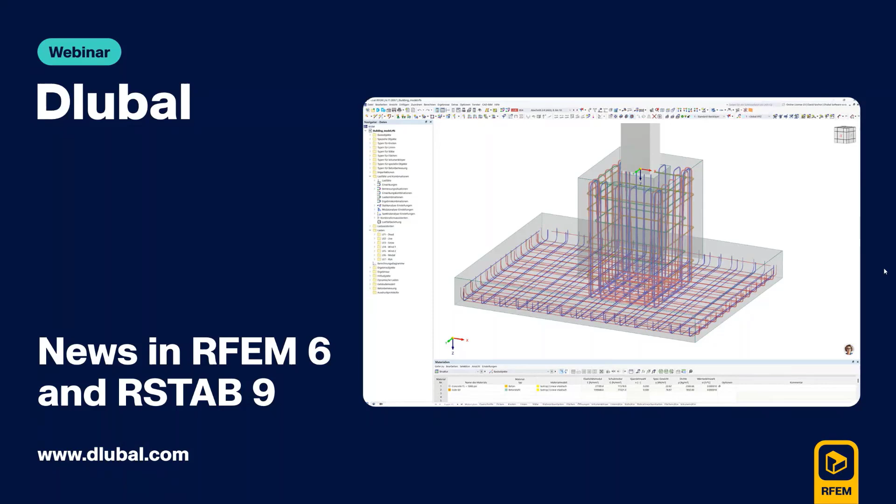Welcome to today's webinar. The topic today is news in RFEM 6 and RSTAB 9. In today's webinar, we will show you features that we have implemented in the last year, in our add-ons, in our programs, our main programs, RFEM 6 and RSTAB 9, and in our standalone programs. And that's the last webinar for the year 2025.

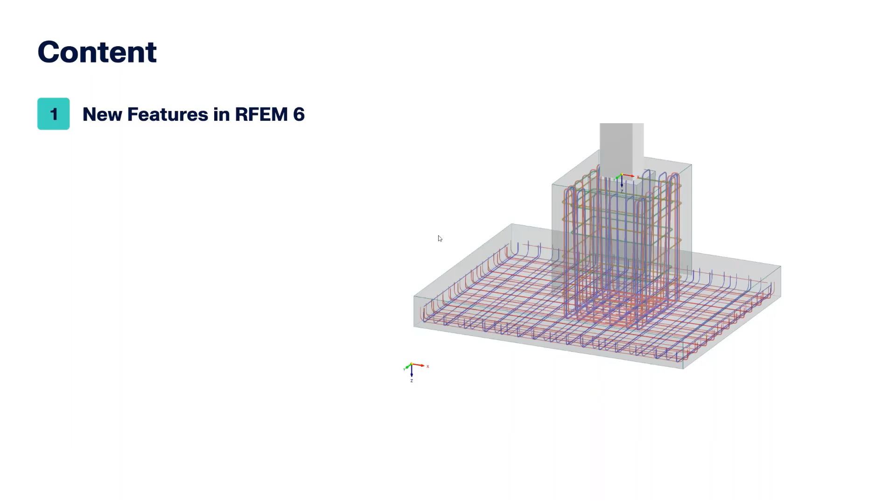To the agenda today: at first, I will show you new features in RFEM 6. Of course, most of them are also valid for RSTAB 9. But as you know, if there are solids or surfaces, then it's only valid for RFEM 6. Then I show you new features in the add-ons and the standalone programs. Then I show you new add-ons, and I look into the future at the end of the webinar.

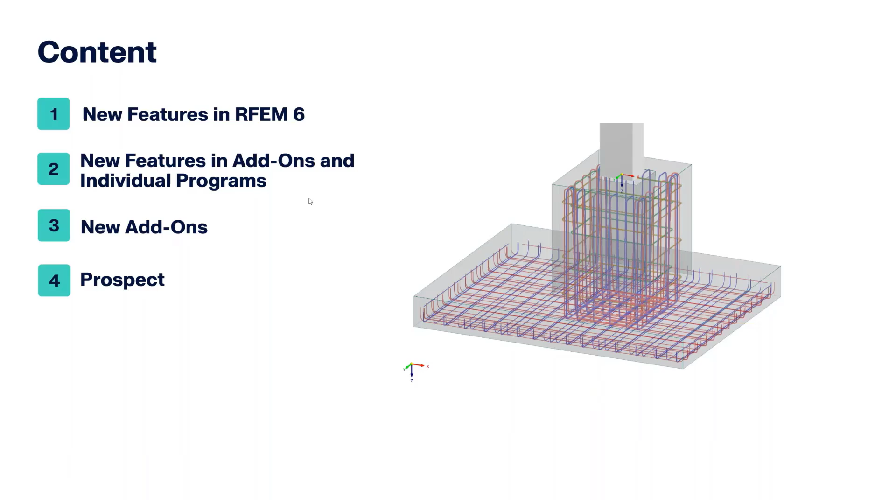Let's start with the features in RFEM 6. First, the result points. You can set such result points very easily on surfaces, solids, and also in the space for wind. I show that in RFEM 6. You can find the result points in the data navigator under result objects. If you right-click on result points, then you can select new result point.

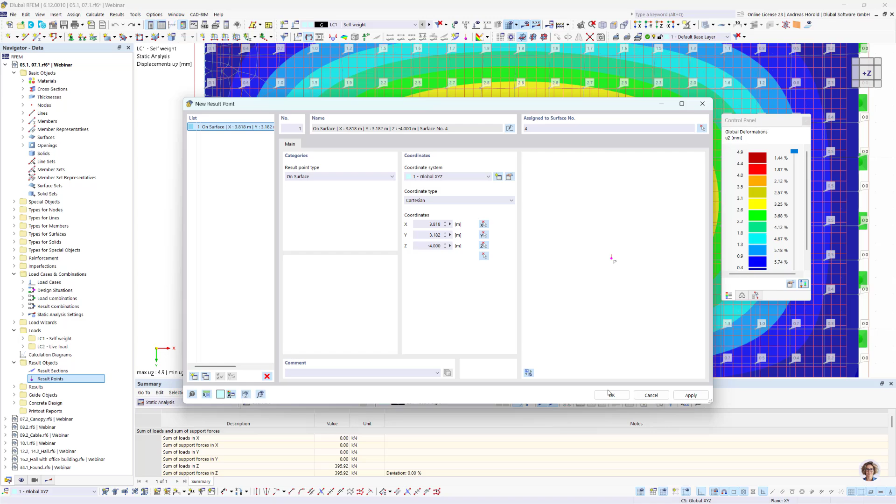Then select any point in the system. The surface is detected automatically, as you can see. And you can see the new result point, also here in the folder under result points. Much easier is to use that button above, new result point, and you can easily set certain result points. And they are also here. And if you want, you can delete any surface result point. Okay, that's all for this feature.

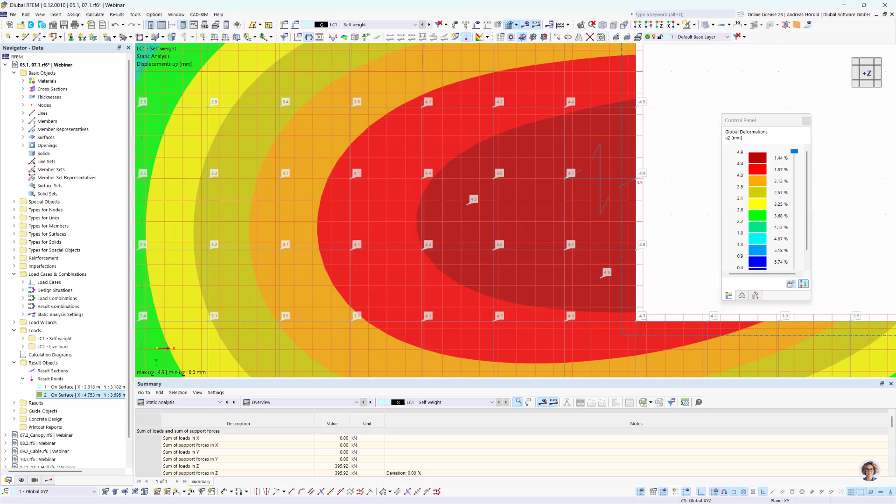We turn to the next feature, back to the PowerPoint. New is the calculation diagram monitor. You can use that, for example, for dynamic analysis. Then the thickness type wall shear free. If you want to use, for example, a masonry wall in a 3D model, and the system shouldn't be stiffened because of the masonry wall, then you can use such a wall shear free.

Then the new member type result line. It's the same function as for the result members, but you don't need to define a cross-section. Only the result line and the area that you select will be integrated. For this area, the results will be integrated in the result line.

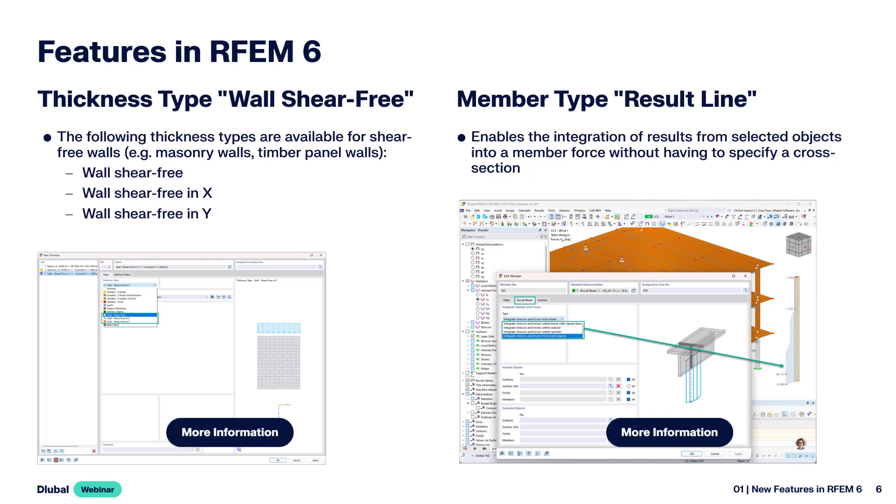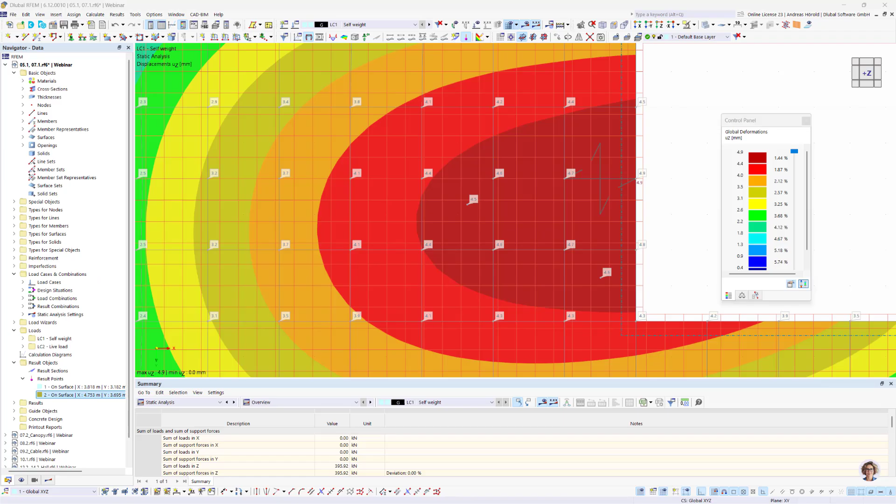Then error messages for invalid and deactivated objects. You can see the error message before the calculation. I will show that in the program. The same model, a reinforced concrete model. If we switch to the concrete design, all members and surfaces are selected, and also the nodes with punching. That makes no sense in this case; we don't have a support in the middle of the surface, for example. So you can see under overview where the error messages are before you calculate the model. And if we deselect all the punching nodes, then there's no error message.

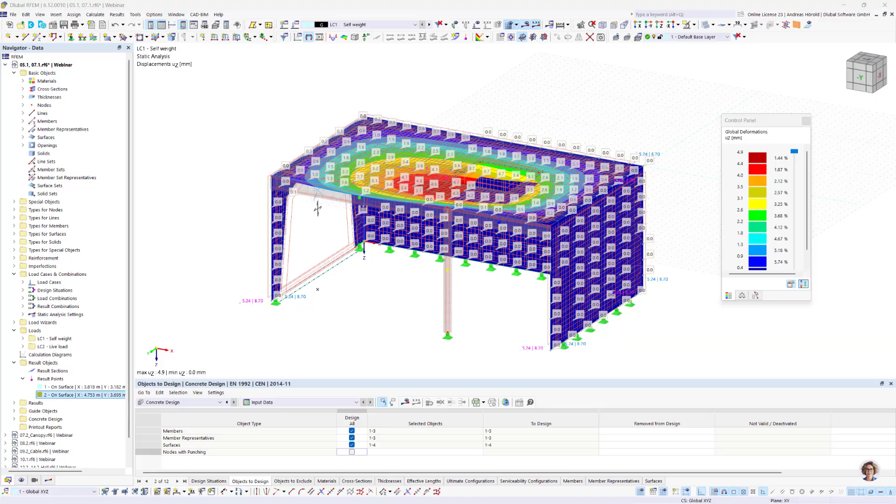Okay, then next feature: life cycle of design results. The results will not be deleted if you want, but they are declared as invalid. And when the calculation is restarted, only the invalid results are updated. I would like to show you that also in the program on another model.

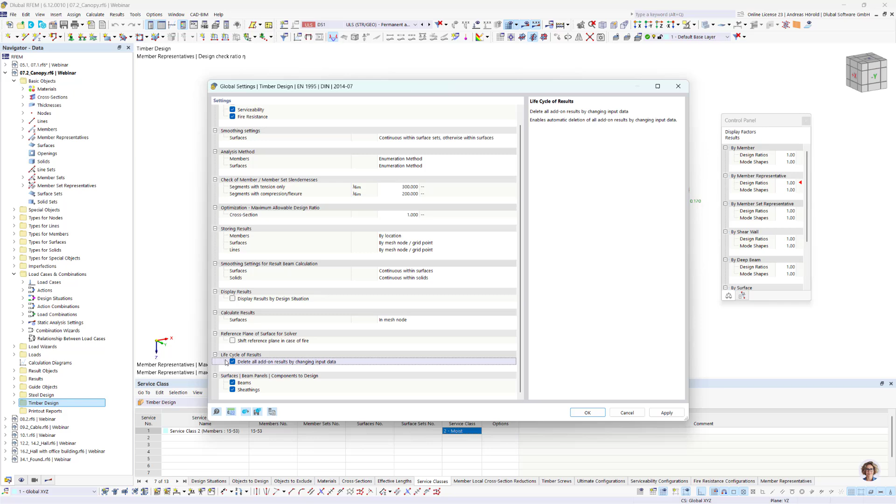For example, for this model, the timber design of the purlins was already done. If you change the settings for one or all of these, for example the service class from moist to wet, then all results would be deleted. We don't do that at the moment. At first, I turn to the timber design here, right-click on it, then settings. If I don't want to delete the results, I have to uncheck this. The default setting was checked, and I uncheck it.

So now when I change to wet, the results won't be deleted, but they are declared as invalid. And if I recalculate all again, then the invalid results will be overwritten.

Often wished features from our customers. So then the next one: you can now log in via your Microsoft account. Then

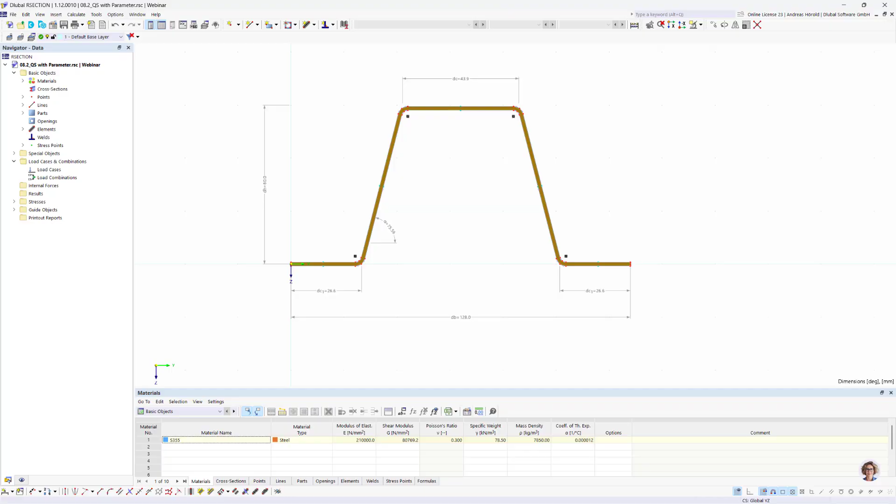parametric cross-sections that you parameterized in RSECTION you can use in RFEM 6 and RSTAB 9, that's clear. But the parameters can be changed directly in the main programs, RFEM and RSTAB. I would like to show that as well. That's a parameterized cross-section in RSECTION. Take a look at the parameters. They are changeable. You can do that here, of course, but also in the main program.

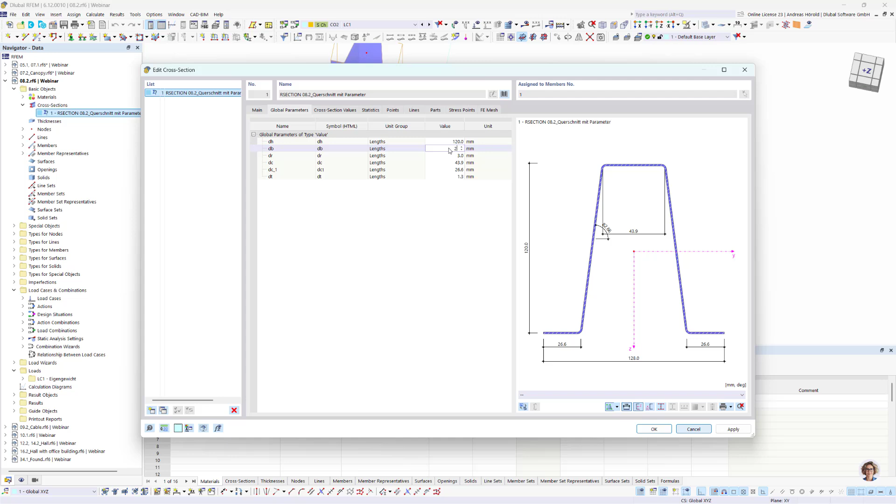So I change to that model. The parameterized cross-section is used. And if I double-click on it, then I can change the parameters here. Yeah, and you can see all will be changed. Okay, then the next feature.

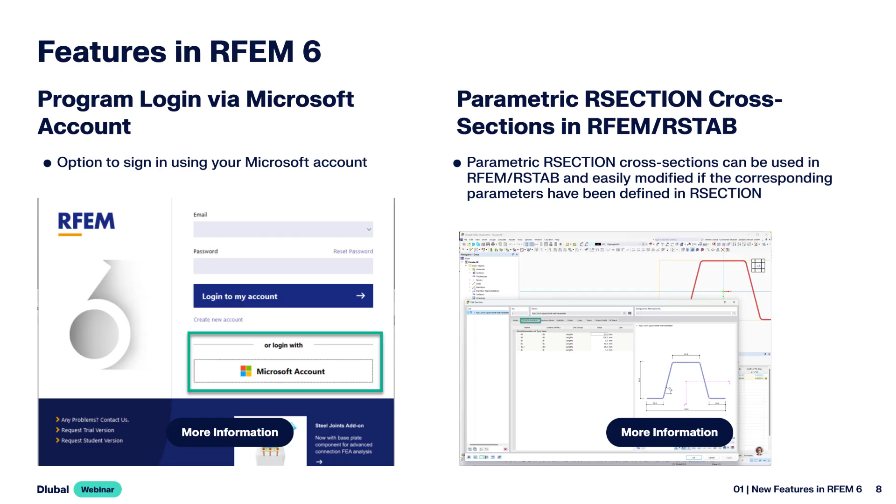The Dlubal API is new, the gRPC. It's up to 15 times faster than traditional technologies such as SOAP or REST. Then use also the member type cable on pulleys. We had this feature already in RFEM 5, but now it's also available in RFEM 6, and you can simulate ropes that are guided over pulleys.

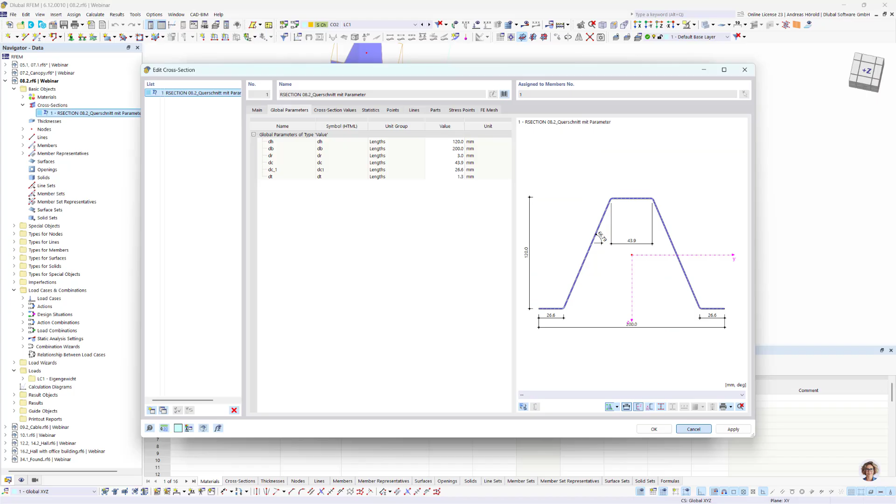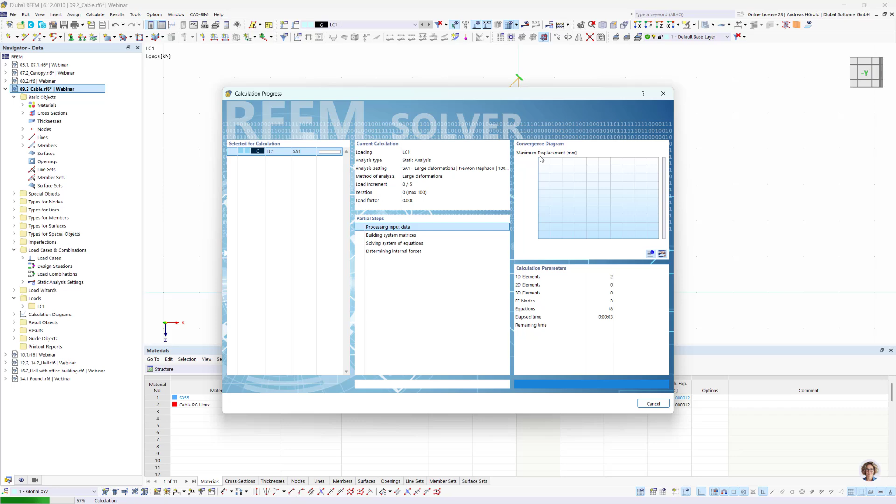And if I change both from cable to cable on pulleys, and then I recalculate all, then the internal force of 20 kilonewton should be in both members. Yeah, also in the diagonal member here. Okay.

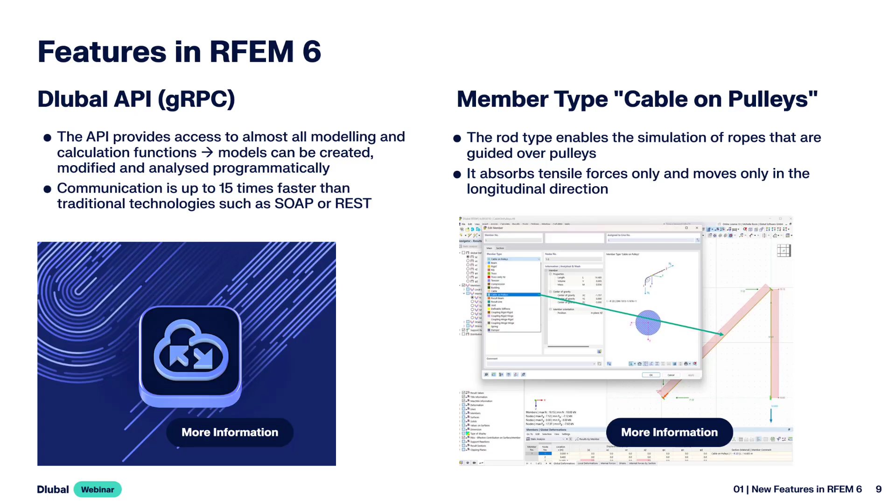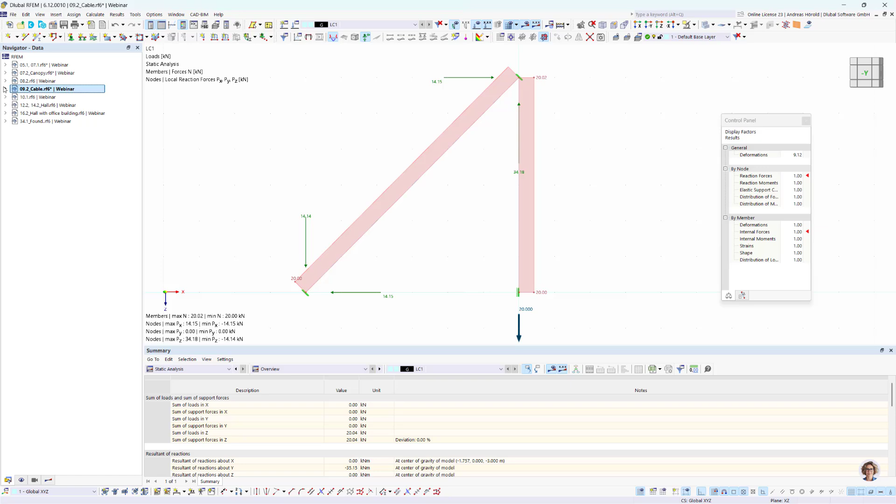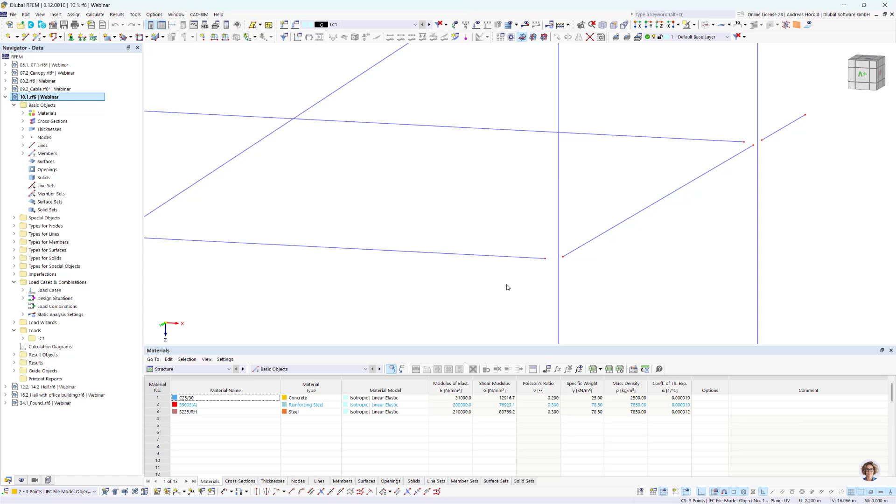So imagine this model was imported from a CAD program, and if you switch to the wireframe model, you can see the members are not connected. And you can do that quite easily when you select, for example, all the nodes, then right-click on one node, edit. And then link, that's the new feature, link to nearby objects.

So I have to create a new nodal link, connect or link to members. Then you can enter a search radius, press OK. And now all is connected by rigid members.

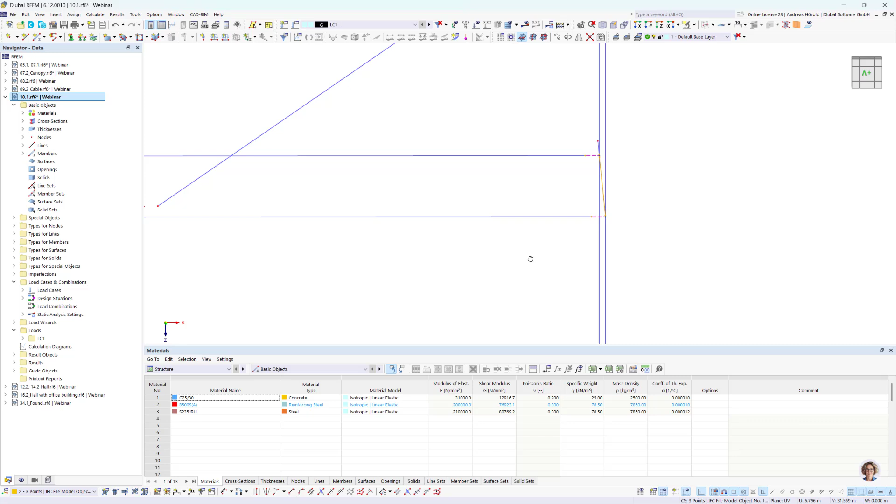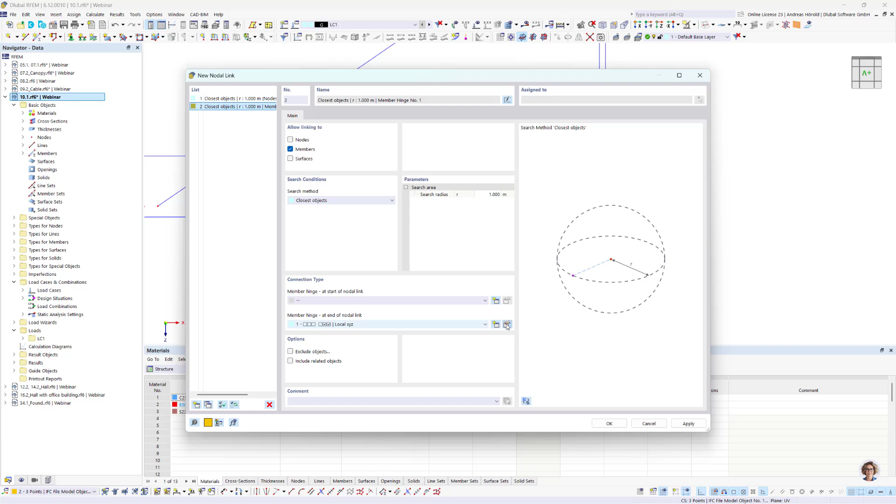And what you also can do is, just a moment, I do that also only for these two nodes. New nodal link, and you can do the same steps here, and you can enter a member hinge if you want. For example, this member hinge. Okay, and now there are member hinges.

A good feature, to select more nodes, not only these ones that I used, maybe in a larger model, and you can do the connection between the members automatically. So then the next feature: hierarchy between load transfer surfaces and floors. That's, for example, usable for curtain walls.

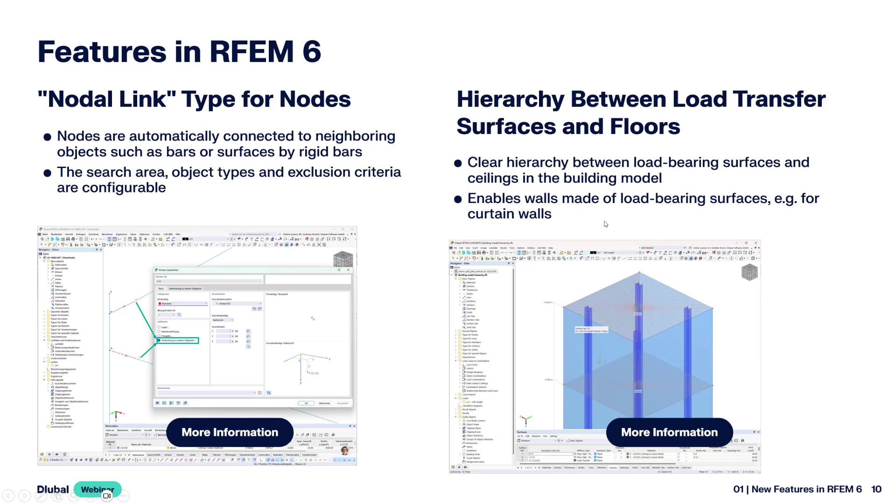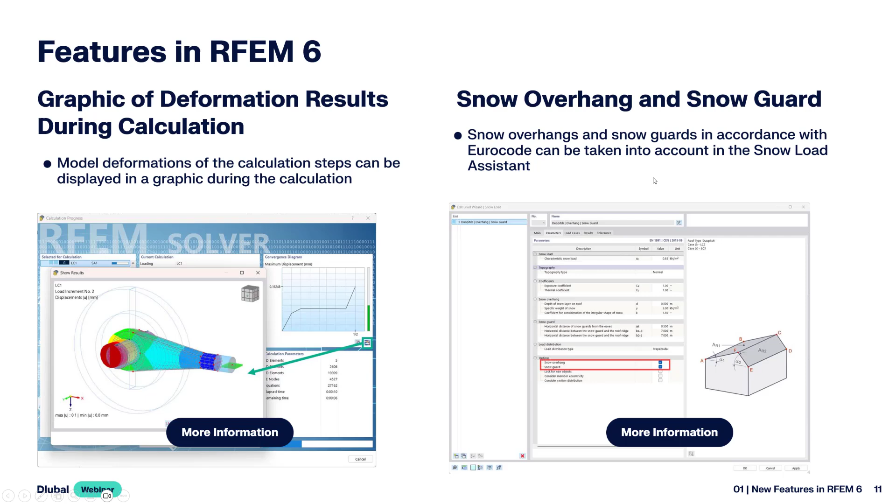Then you can watch the graphic of the deformation results during the calculation with that button here. Snow overhang and snow guard can be taken into account for the Eurocode. Then you can use user-defined textures. For example, you made a presentation for the architect or for the owner, and you would like to use certain textures. You can use them.

Then the import and export of Excel tables is possible, and you can customize the options for the data exchange. I would like to show that also in the program. So on the next model, you can change the settings here, the setting dialog for the export-import table. For example, you can export also the table header, and those are the other options.

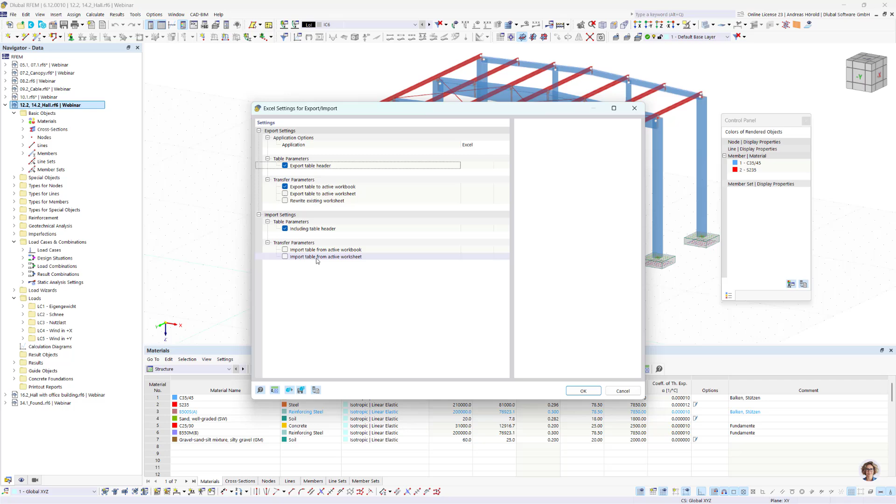And then you can export to Excel. What is also new is export to JSON. So I export it to Excel. That will take some seconds the first time. I already switched to Excel. And the table was created.

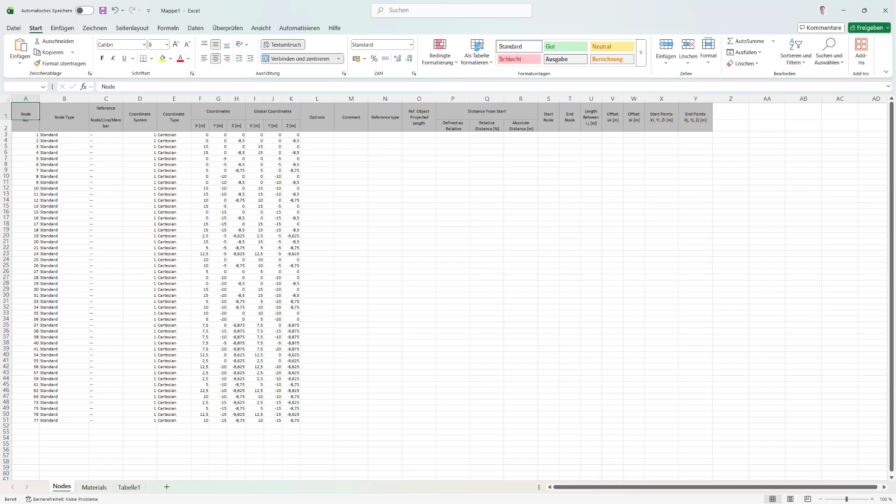You can do that also for another table, maybe the nodes. Okay. Then we wait in Excel. So also this table was transferred. So then turn back to the slides.

New is the RTF export of the printout report. And you can export it, of course, also in a PDF or HTML file. And RTF can, for example, be used in Microsoft Word. Then the scaffolding support is also new, RFEM 6 and RSTAB 9.

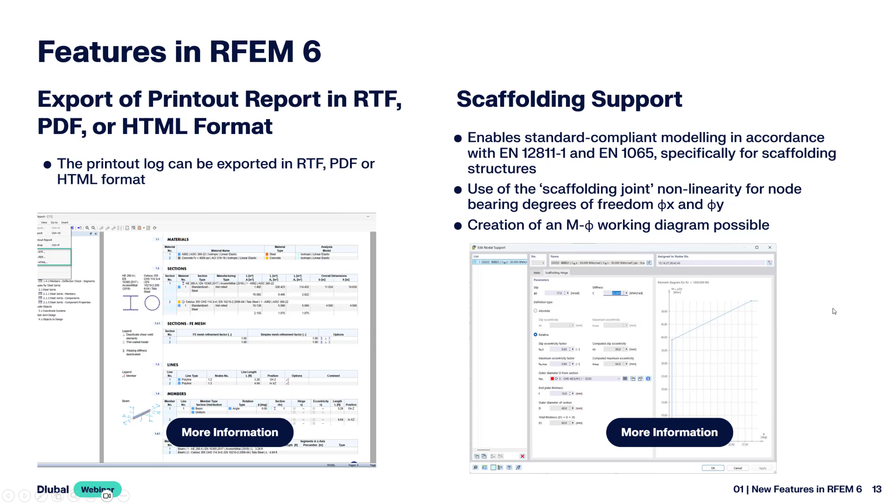Then the link type for lines, a similar feature as the node connection that I just showed you, the nodal link. If you have, for example, two surfaces, a slab and a wall, you can connect them with the same procedure that I showed for the nodal link. Then multiple combination wizards are possible now. I show it also in the program.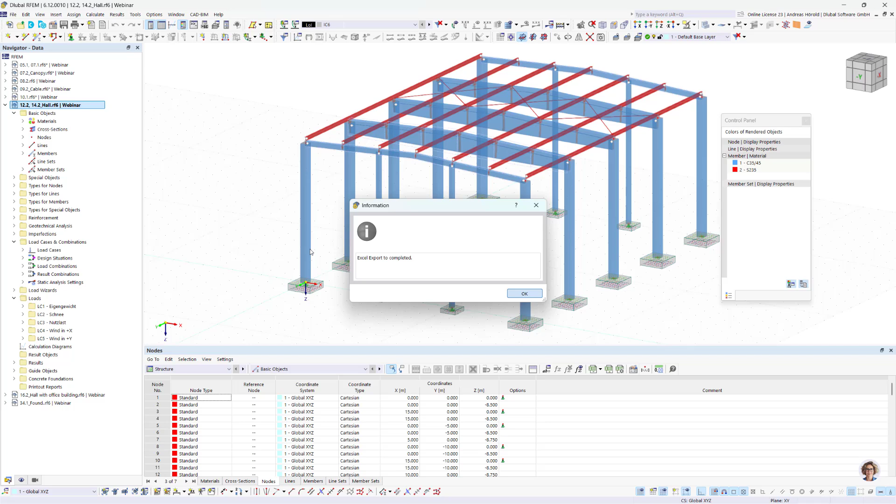So, for example, this model. Sorry, that was not the right model. That model. So let me switch. Okay, so then you have to open the load cases and combinations dialog. And then that is the new feature: additional standard groups for the combination wizard. If I press here, I can select up to 5 standards.

For example, for cranes and geotechnics and so on. It depends what you like to design in your model. For example, here cranes and the foundations. Okay, so then we turn back to the slides.

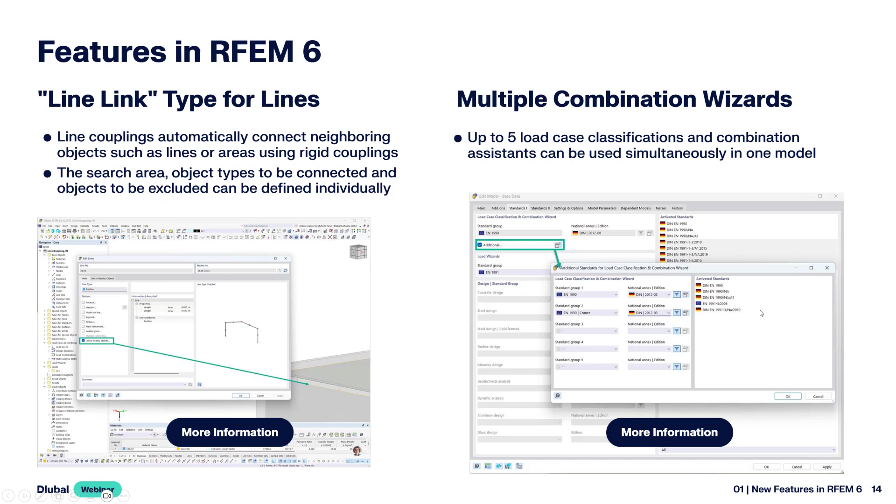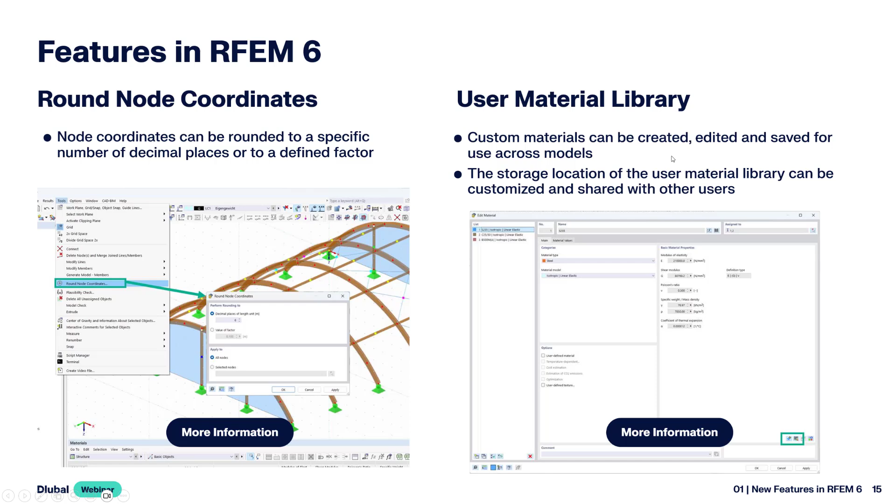Then the user material library is also new. You can define your own material. For example, you import material from the database and change it according to the material you'd like to define.

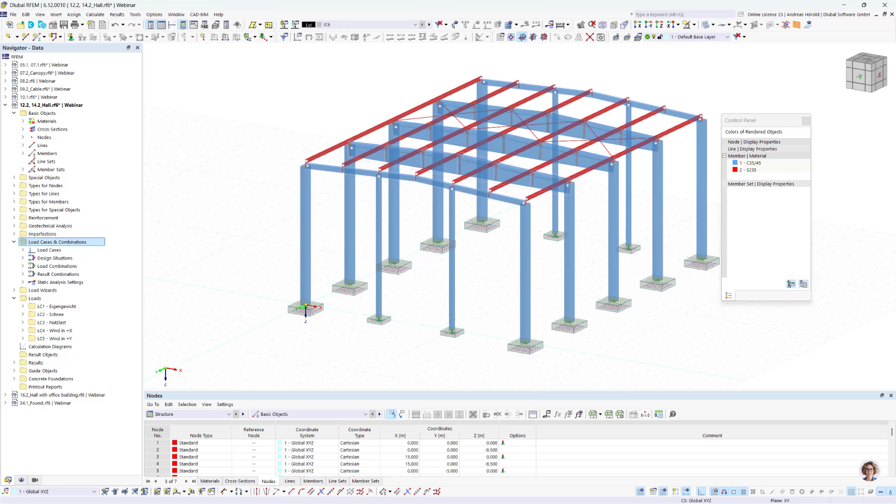Then parametric rebar cross-sections is also new. Then you can export DXF of a 3D scene. What you set in RFEM will be supported. I will show that also in the program, this time on this model.

If you don't want to export the nodal supports and the openings and so on, you have to deselect them. I will do that in the navigator display. For example, I deselect the nodes, then the openings, that means only the line around the opening, and the nodal supports. So then right click, export 3D scene to DXF. Okay.

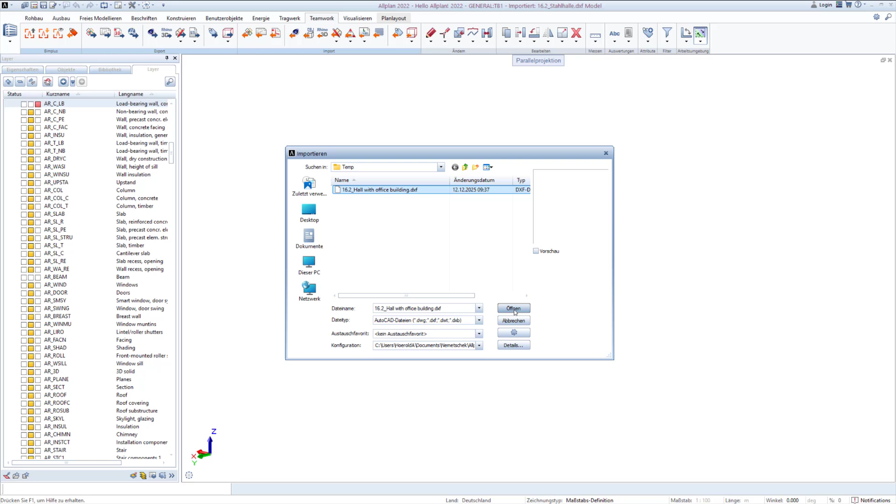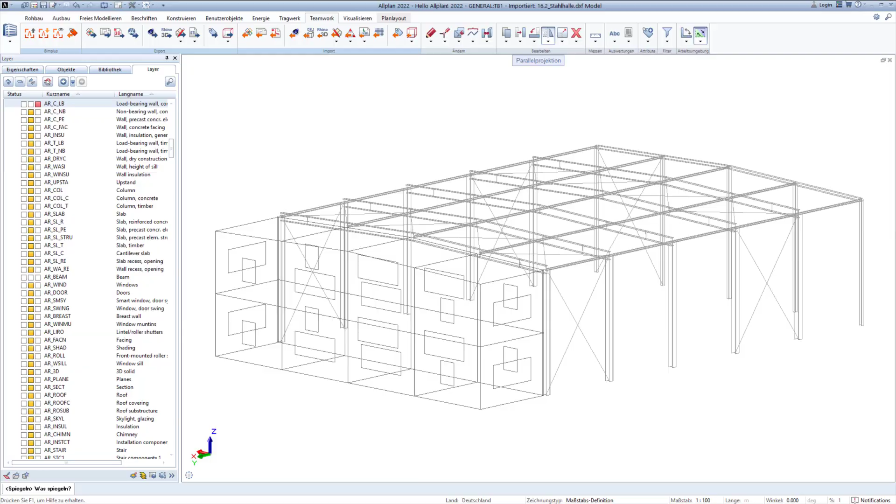So then I turn to a CAD program, in this case Allplan. I import this model, or this DXF. Okay, the coordinate is set upwards, but I can mirror all. It's no problem. So now you can see all that you wanted to export. You can now work in the CAD program with that model or with the lines. So then we turn back to the presentation.

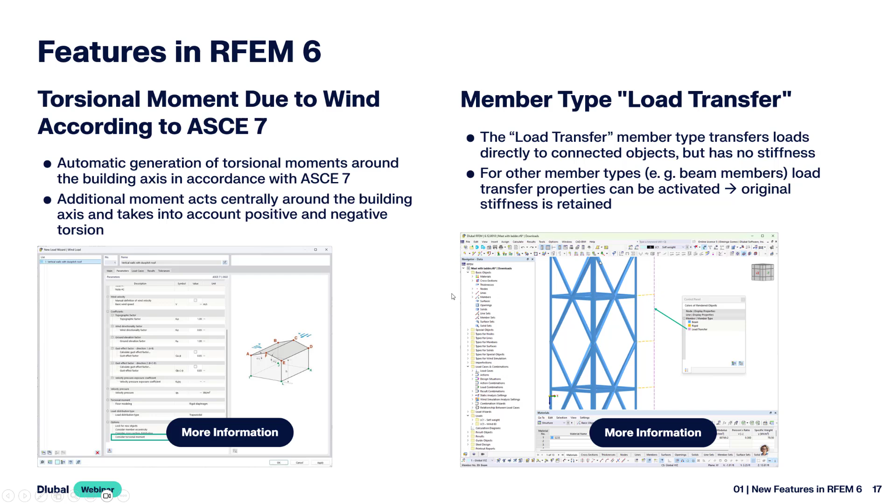That's a feature for America: the torsional moment due to wind was implemented. Then the new member type load transfer transfers loads directly to the connected objects, and it has no stiffness. I showed it also in the program when I showed you the Excel export. Also JSON is possible.

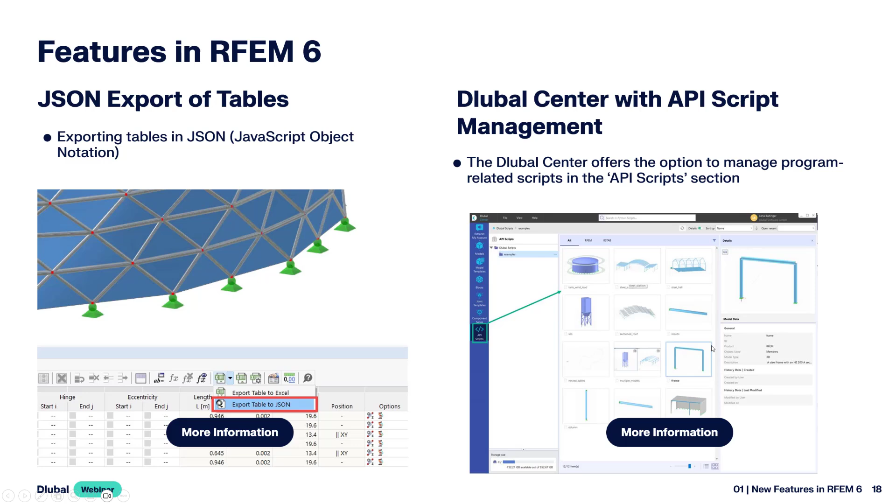Then the Dlubal Center with API script management. You have different examples already here, and you can use them or create your own API scripts and manage them in the Dlubal Center. So now we turn to the features in the add-ons.

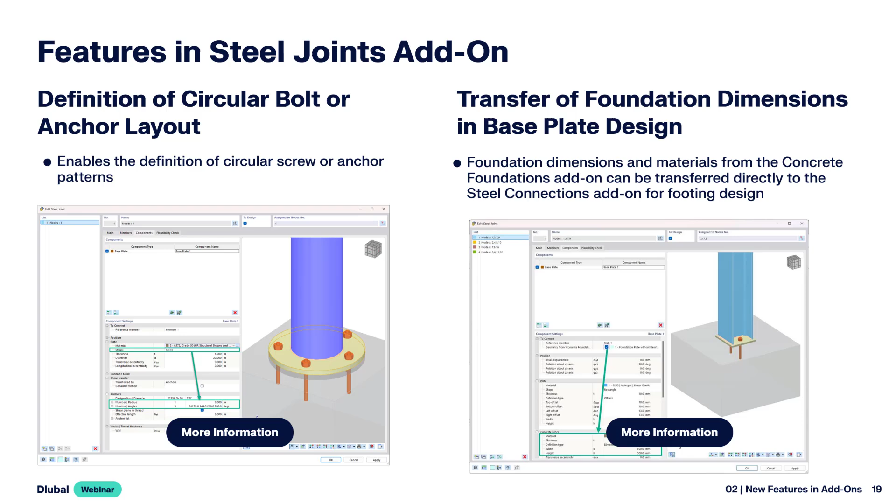Features in the steel joints add-on. Those are the first features: definition of circular bolt or anchor layout. You can see that in the image here. Then you can transfer foundation dimensions in the base plate design. When you designed a foundation in the concrete foundation add-on, then it can be transferred to the steel joints add-on.

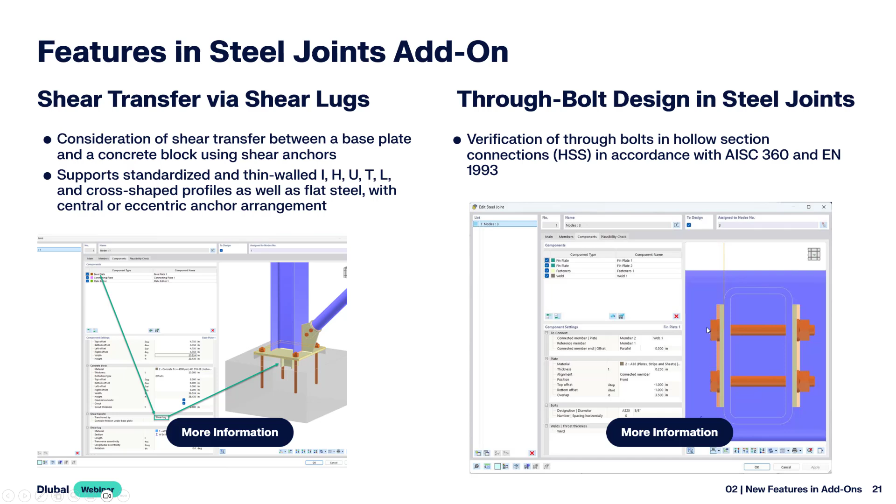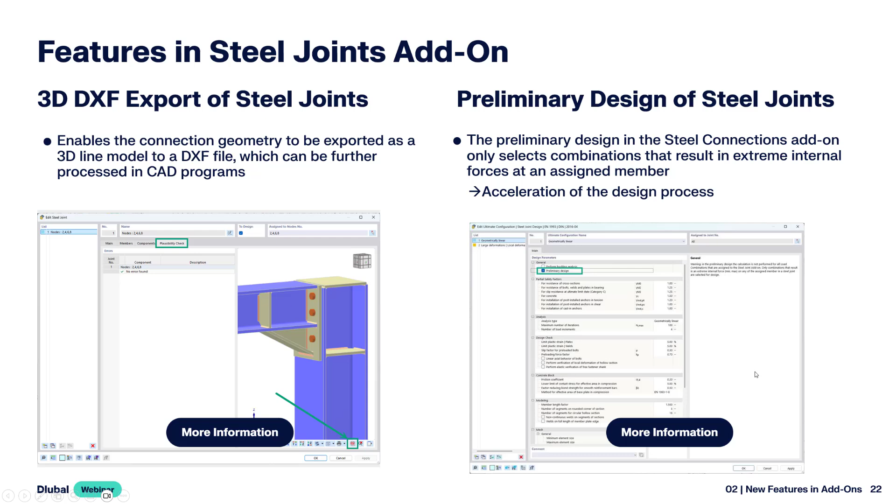And you can also export the 3D lines of the steel joints. It's a similar workflow as I showed in the program for the hull. Then preliminary design of steel joints. The advantage is the acceleration of the design process with this preliminary design.

Then more than the often used diameters are available now, from M6 to M64, not only from M12 to M36. Then there are also hook anchors and headed anchors. Those are headed anchors in the image here, but also hook anchors are available.

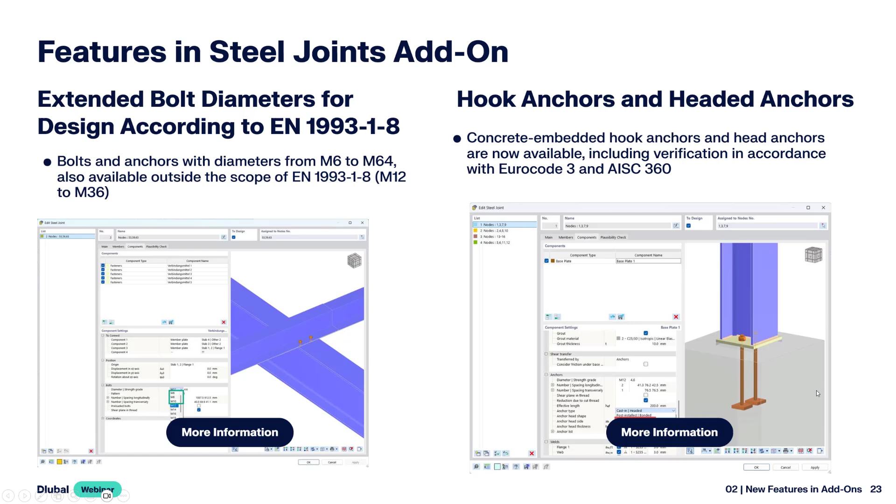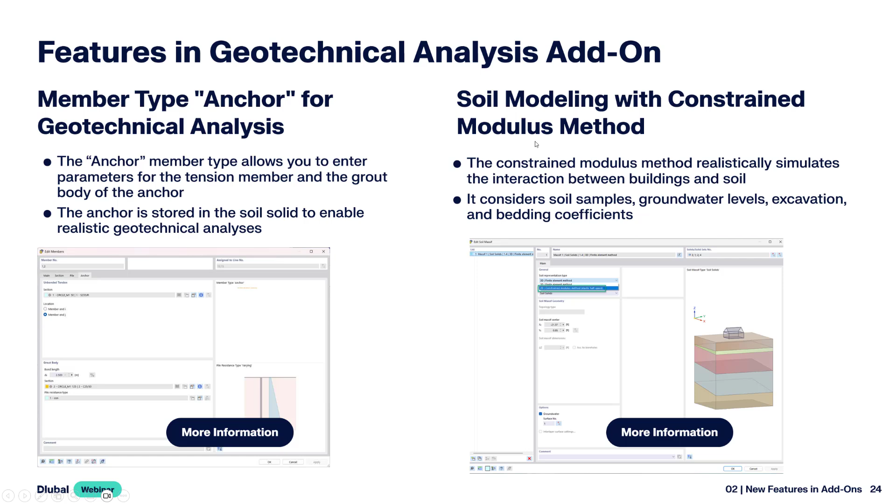Then the features in the geotechnical analysis add-on. The member type anchor is available. Then the constrained modulus method is also available now. And new is the generation of soil layers. Okay.

Then the timber design add-on: the beam panel, semi-rigid joint of sheathing for the different standards. Then the design of compression perpendicular to grain at nodes with several members. Imagine you have a node where more than one member is connected. Then you can select the different members that will be considered for this design.

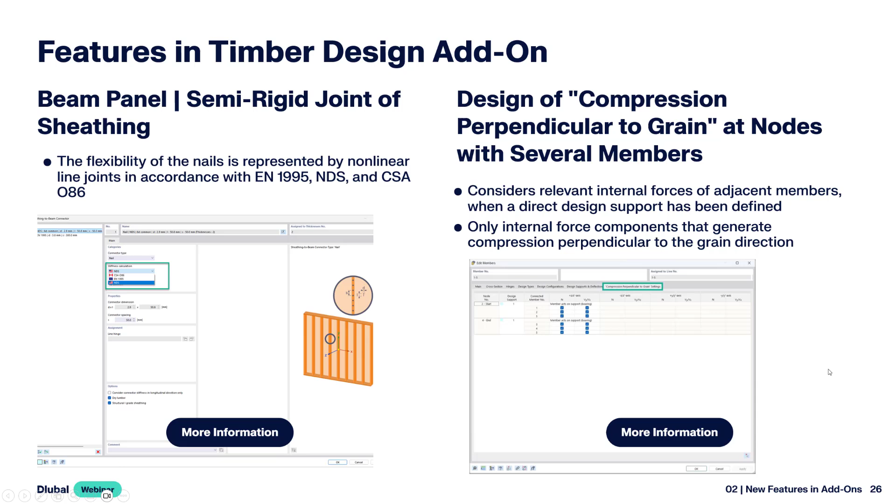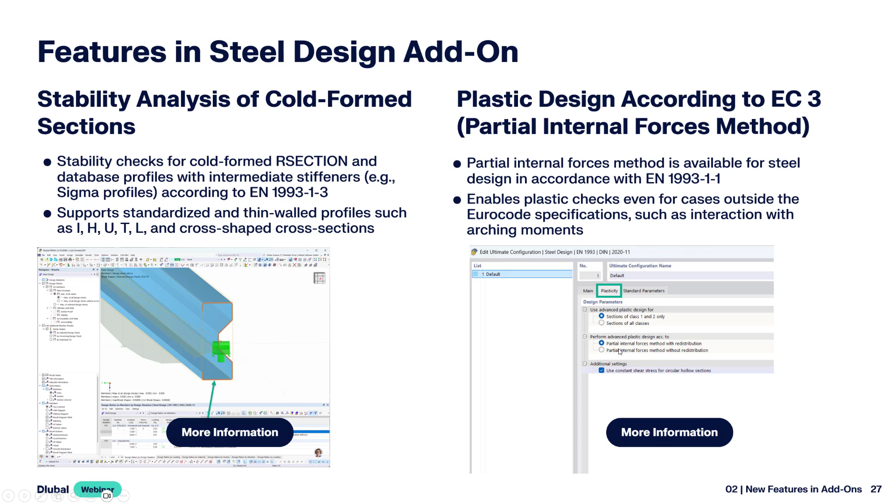Then features in the steel design add-on. You can now analyze cold-formed sections. And new is the partial internal forces method for the plastic design according to Eurocode. Then the design of surfaces is now possible, also for aluminium surfaces.

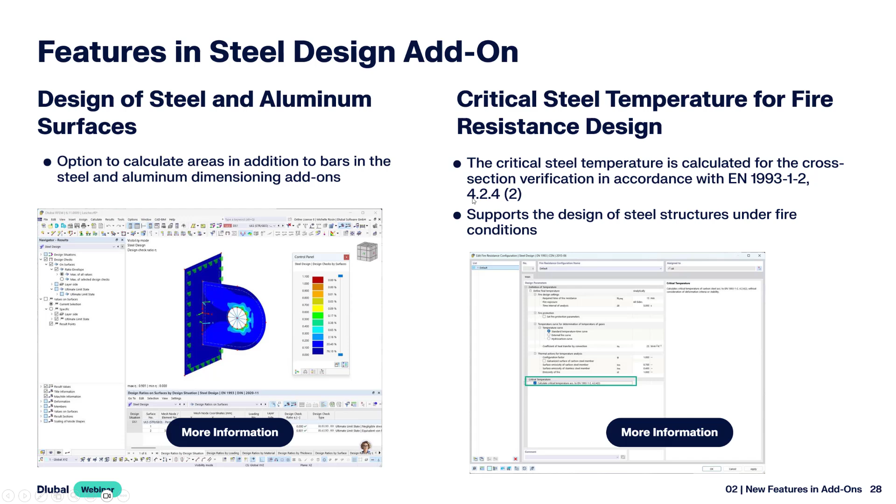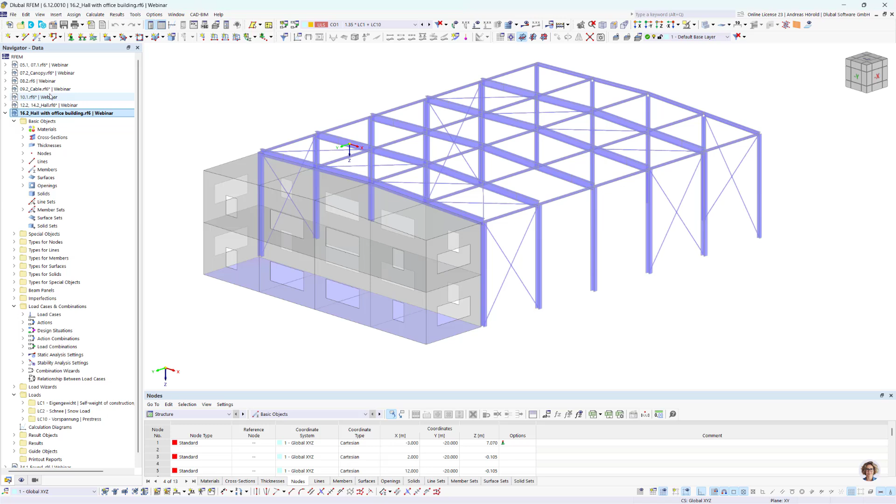And you can design longitudinal fillet welds according to Eurocode 3. I will also show that in the program, in a model that was designed. So imagine those are HE120A, and we would like to change that cross-section to a welded cross-section.

So I go to the library, thin-walled. The parameters of the previous cross-section were proposed now here. I use them, but I have to change the manufacturing type to welded. And I can enter a weld here. Okay.

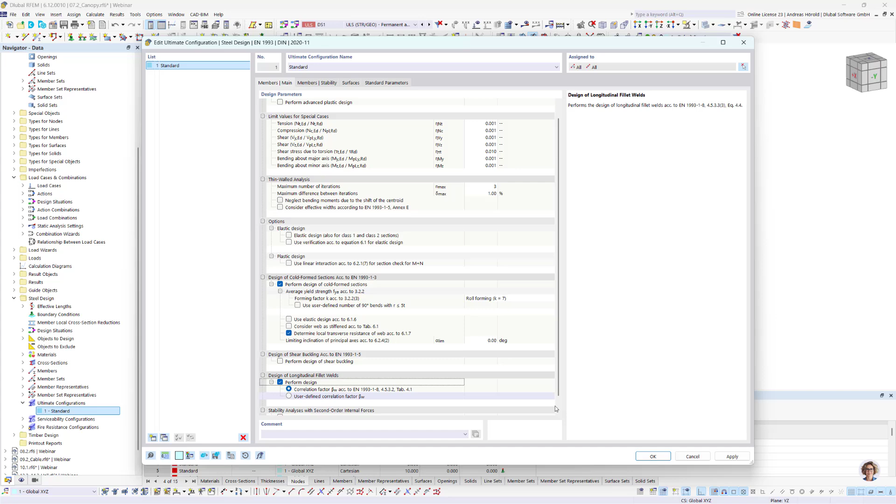Then I have to activate the weld design in the navigator data under steel design. I have to change the ultimate configuration, and I have to check here: design of longitudinal fillet welds, perform design. You can use the correlation factor according to Eurocode, or you can enter a user-defined correlation factor. The factor depends on the material. In this case, it's 0.8 for S235. Okay, so then we run the steel design.

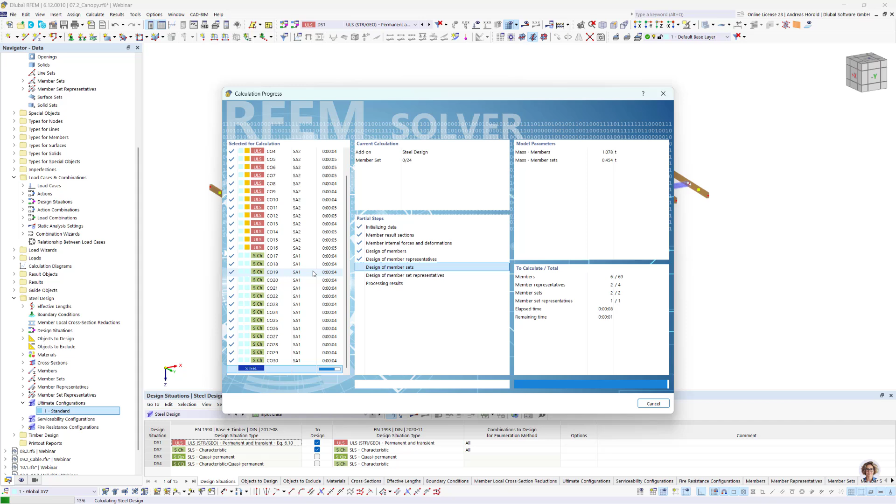All load cases and combinations are recalculated, but with the multi-core calculation, it takes only some seconds. So then let's turn to the results. I have to select the ratios by cross-section. Okay, that's the right cross-section. And you can see, let me check.

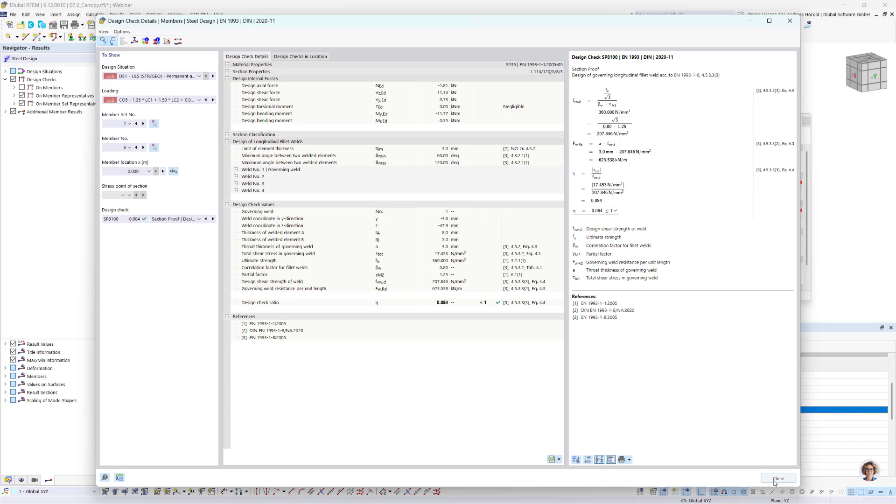Here, section proof, design of governing longitudinal fillet weld. You can double-click on it. That's the formula. You can see the correlation factor here, 0.8, and the design ratio. And you can print the design check and the formulas in the printout report or directly in the printer. So then we turn back to the presentation.

Features in the add-ons steel design, glass design, aluminum design, and timber design. The features: serviceability, minimum or maximum relative and absolute value. As an example, you have a single span beam. The maximum deformation should be L divided by 300, but also the maximum deformation should be, for example, 20 millimeters. And you can define this value now also here.

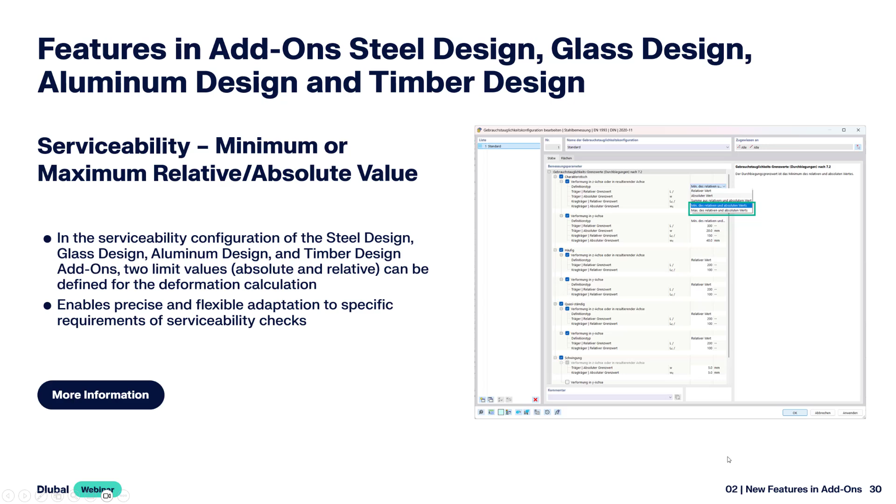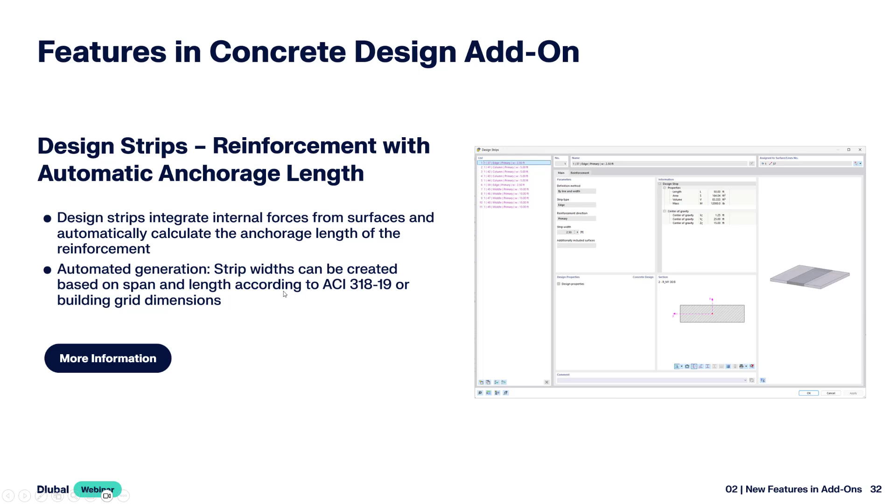So then features in the add-ons concrete design and push-over analysis. The plastic hinges according to the American standards are now available. Then concrete design, design strips. That's also a feature for the American users. Then the rebar member type is also available. There's an automatic connection function to other elements, surfaces, and so on. Then the punching reinforcement types according to the American and Canadian standards. We will implement such bolts and so on also for the European standard. That's planned.

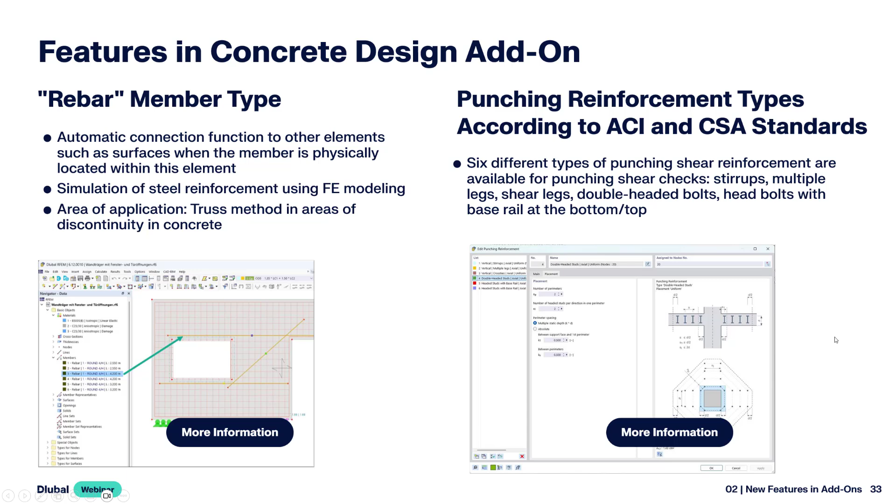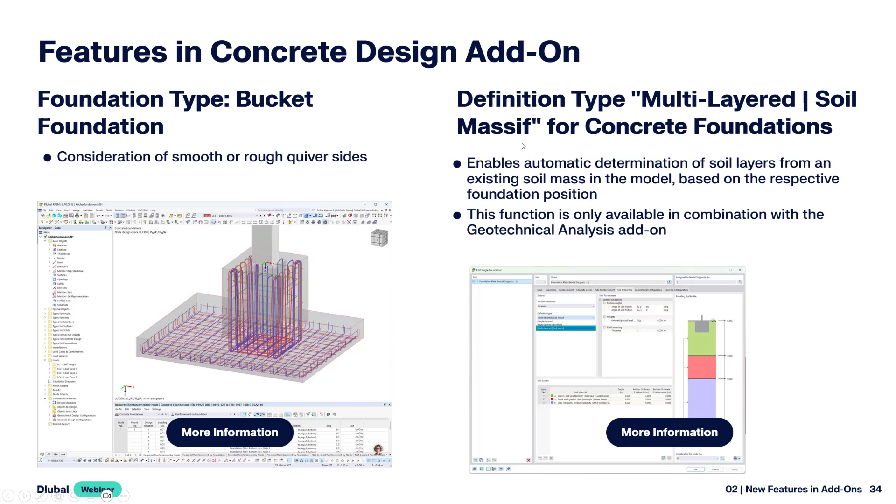Then the features in the concrete design add-on: foundation type bucket foundation, that's new. Then also the definition of the multi-layered soil massif, and you can import the soil from borehole for foundations. I will show you these three features in the program. So that's the latest model for today. I click on one foundation here. There are the different types here.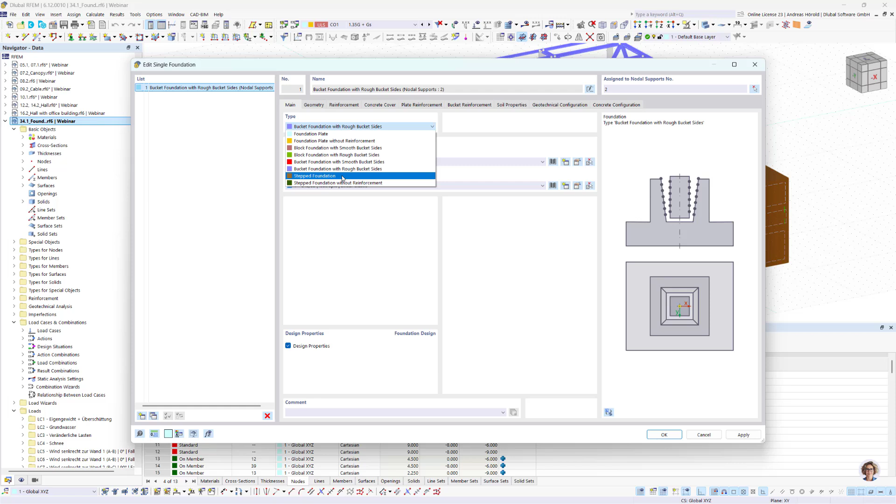Foundation plate, then without reinforcement, then the block foundation with smooth bucket sides or rough bucket sides, and quite new is the bucket foundation with smooth bucket sides and rough bucket sides. Block foundations, bucket foundations. And we will implement also the stepped foundations. You can't define design properties yet. It's in progress.

And then in the soil properties, you can define types multi-layered soil massive and multi-layered borehole. Those are the new features. Okay, let's turn back to the presentation. Features in the construction stages analysis add-on: you can modify design properties for the different construction stages.

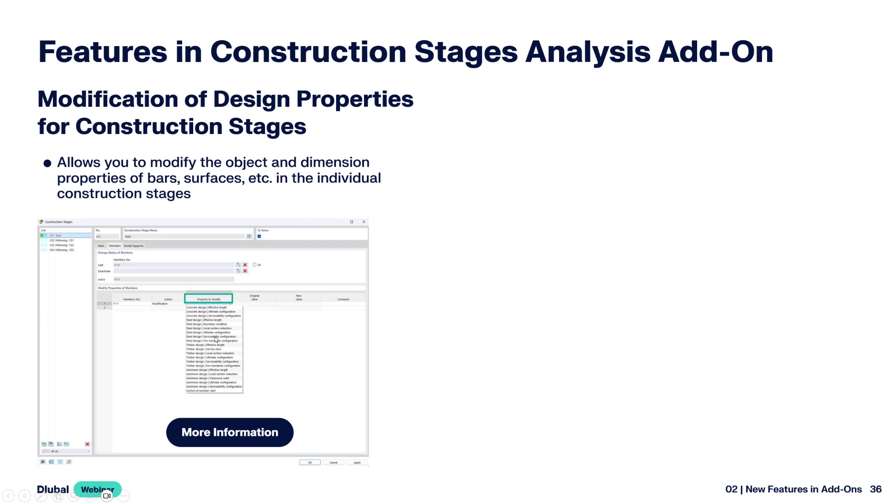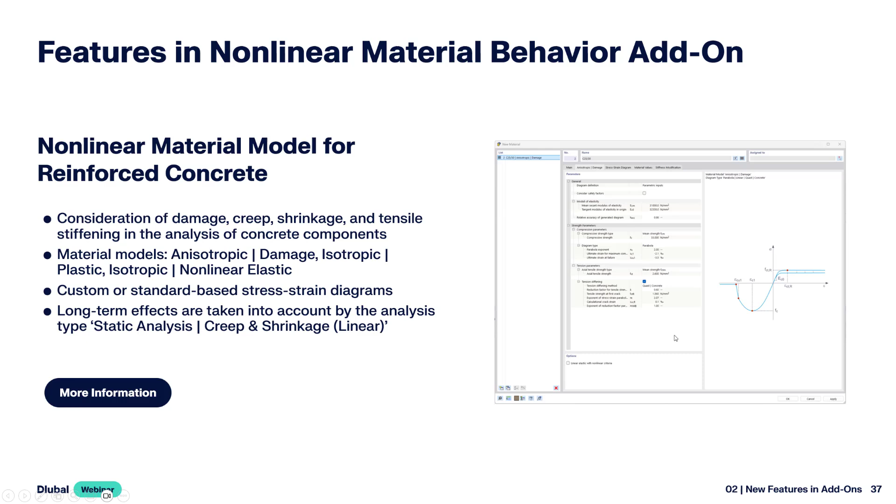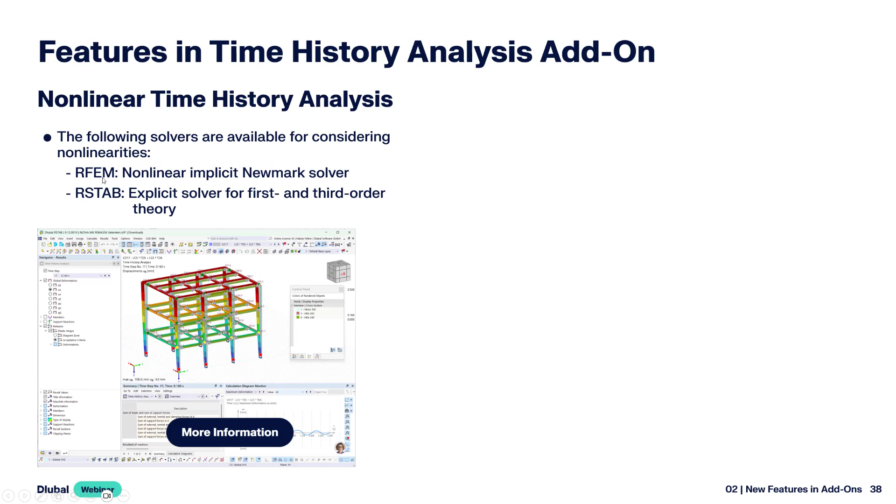Then features in the non-linear material behavior add-on. You can use the non-linear material model for reinforced concrete. Those are the new material types: anisotropic damage, isotropic plastic, isotropic nonlinear elastic. And you can use them for the nonlinear reinforced concrete design. Then new in the time history analysis add-on is the nonlinear time history analysis, with different solvers for RFEM and RSTAB.

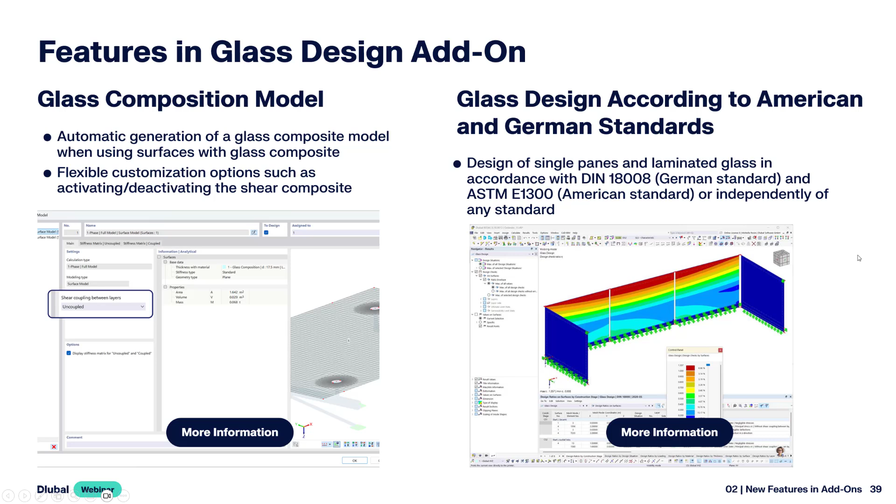Then new in the glass design add-on, the glass composition model. Then you can do a glass design according to the American standard as well, and of course also the German standard. Then you can use NURBS surfaces. Now you are very flexible with the surfaces of the glasses. And you can design user-defined glass solids.

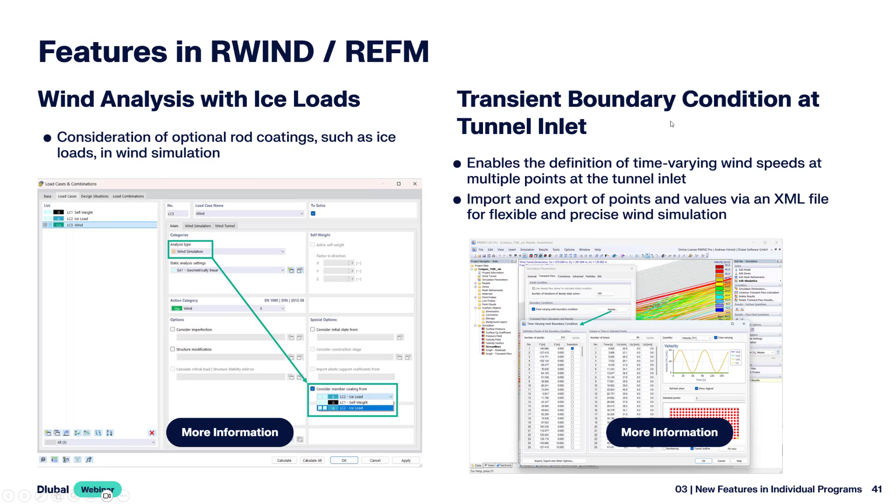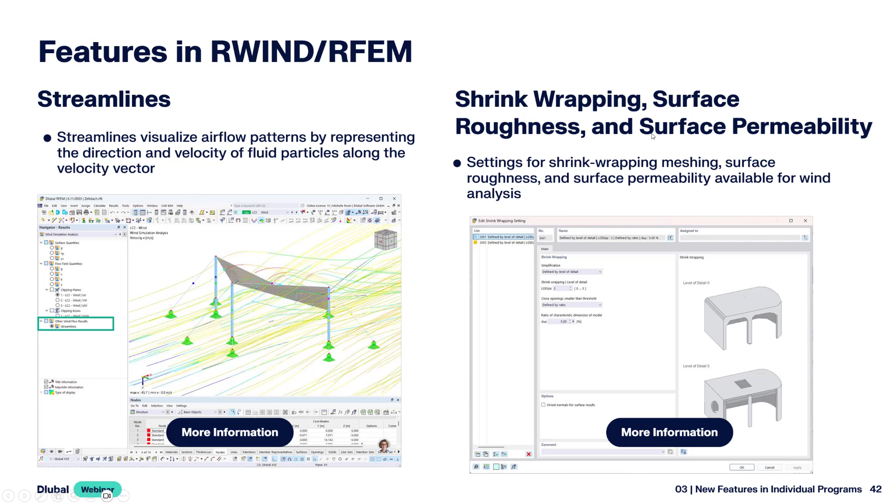Then features in RWIND and RFEM. The wind analysis with ice loads is now possible. Then the transient boundary condition at the tunnel inlet. Then you can show the streamlines, not only in RWIND, but also in RFEM. And use also the shrink wrapping and surface roughness and surface permeability.

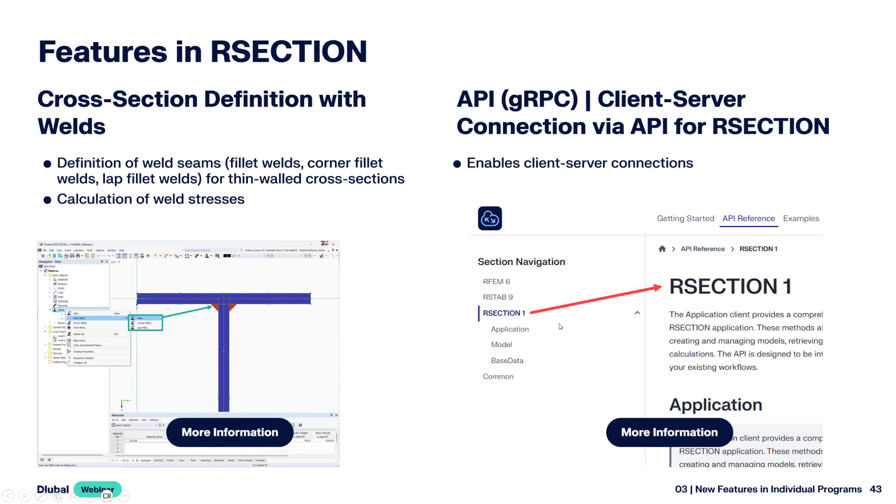Then features in RSECTION: the cross-section definition with welds is possible. RSECTION can now be connected to the API. You can see that also in the client server, not only for RFEM 6 and RSTAB 9, but also for RSECTION now. Then we turn to the new add-ons.

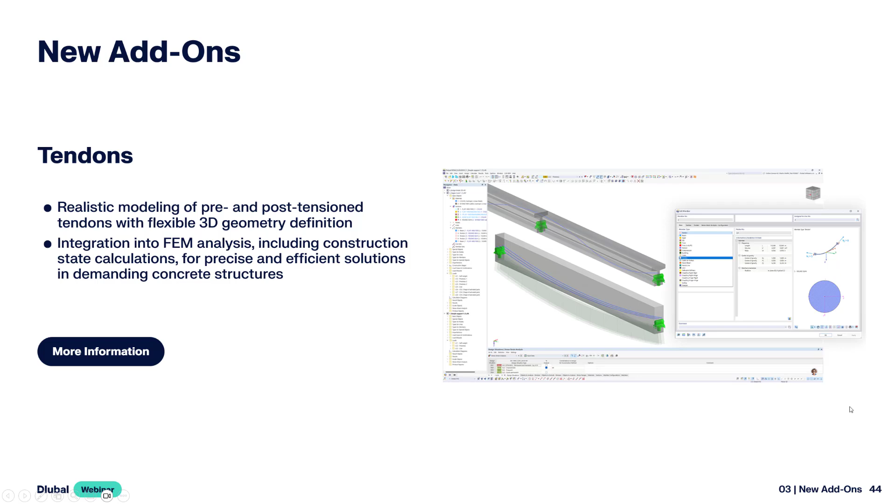That's the tendons add-on. It's currently in beta status, but it works already fine. We have already 2 customer projects that used the tendons add-on and got very good results. Then the digital twins, which enable sensors and their measurement data to be stored in the model.

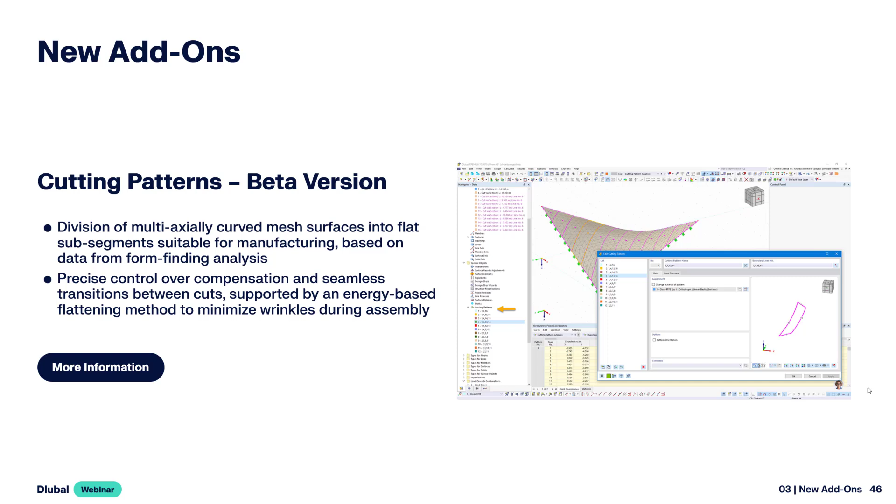Then the cutting patterns add-on, also in the beta version. That's quite new, but we are still working on it. So then we turn to the last point for today, the prospect. That was the plan that I showed 1 year ago.

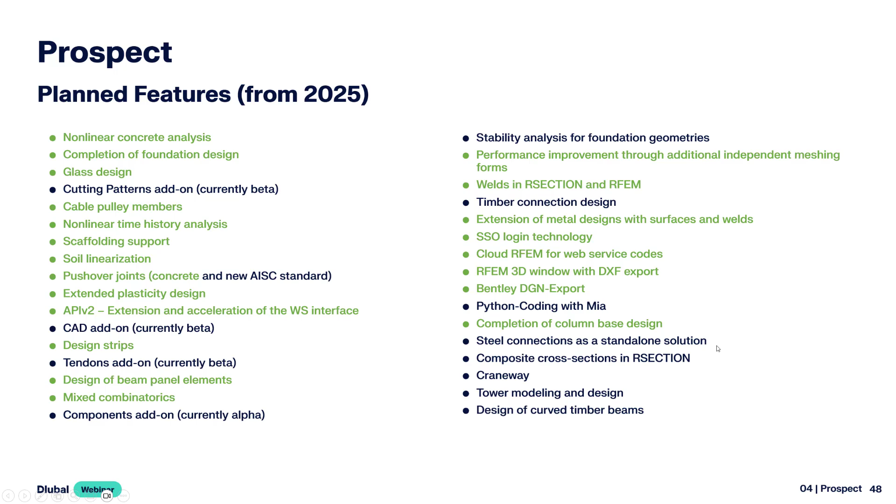For this year and the future, we implemented all the green features. I showed you some of them, the cable pulleys on members and so on. So, and that's the plan from now for the next year and the next years. Let me explain only some features.